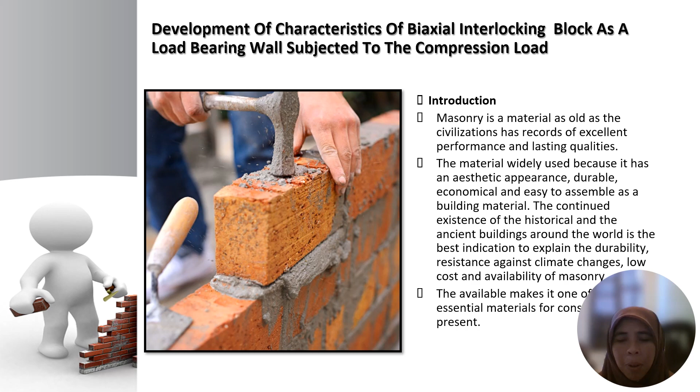as a building material. The continued existence of historical and ancient buildings around the world is the best indication to explain the durability, resistance against climate change, low cost, and availability of masonry. The state of the art of masonry, the biaxial interlocking block or BIB, is a new masonry unit that has been introduced to the industry. This masonry unit consists of multiple grooves and tongues as a locking system in the X and Y direction.

The interlocking blocks give various advantages such as reduced self-weight, reduced design load, simple handling, simplification of building components, increased compressive strength, reduced workforce, increased construction quality and quantity, and reduced project construction time. Furthermore, the interlocking block units can be applied as a load-bearing wall by a reinforced method, which is putting in grout material.

This study focuses on biaxial interlocking block properties and behavior as a walling unit with the interlocking mechanism through the grooves and tongues under uniaxial compression load. The main features which a masonry wall must offer are compression, tensile, flexural, and shear strength. Generally, masonry is strong in compression but weak in tension. The compressive behavior of masonry due to vertical load is of crucial importance for design and safety and has been studied extensively over the years.

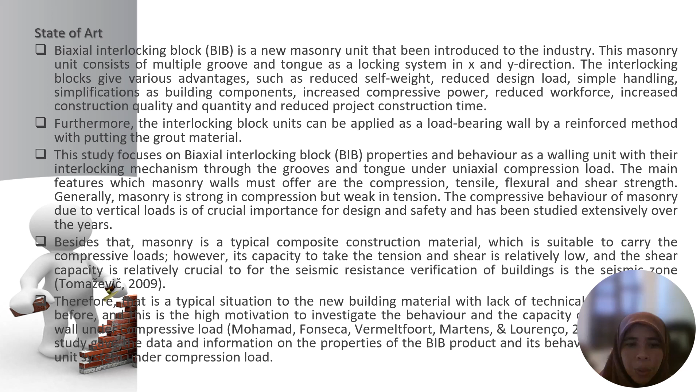So, the problem statement for this research starts with the current application of masonry material in construction projects. As we know, cement sand brick is the most preferable masonry unit in masonry construction. It is due to the advantages of cement sand brick, which are low cost material, light in self-weight, etc. However, there are several weaknesses of brickwork masonry, such as labor, time consumption, and quality of the project.

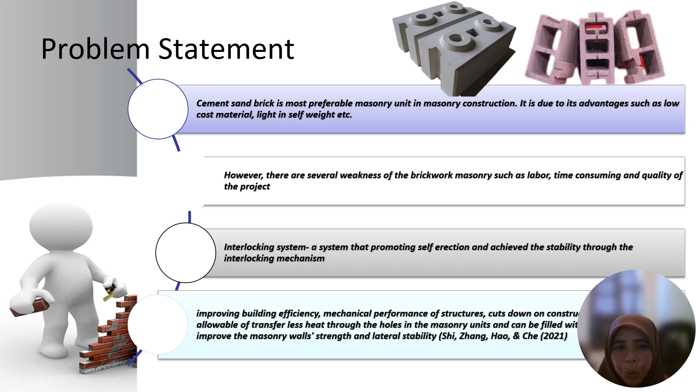Interlocking system is a system that promotes self erection and achieves stability through the interlocking mechanism. So the objective of this study is investigating the properties and behavior of the biaxial interlocking block (BIB) subjected to compression load in masonry construction. To ensure that BIB is appropriate following the British European Standard BS EN 1996-1-2:2005 masonry structures, the BIB needs to be studied inside and out.

Therefore, the objectives to achieve this aim are: first, to develop properties of the BIB single unit with and without grouting material, and then compare to the cement sand brick and solid block properties. Second, to evaluate and analyze the mechanical properties and behavior of the wall system using grouted and ungrouted BIB compared to the cement sand brick wall and solid block walls.

Third, to assess the correlation coefficient and develop mechanical properties prediction equations of grouted and ungrouted BIB, cement sand brick and solid block walls. The fourth is to perform a parametric study using the established model and evaluate the walling properties due to changes of parametric values of grouted BIB, ungrouted BIB, cement sand brick, and also solid block walls.

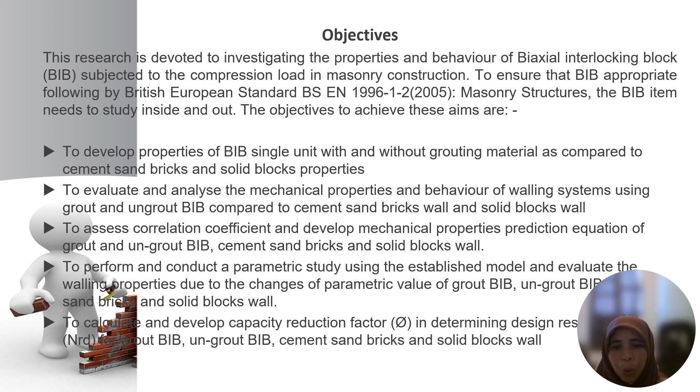And the last one is to calculate and develop the capacity reduction factor in determining the design resistance of the BIB unit, cement sand brick, and solid block walls. So the scope of this study covers the title and objectives of the study, and can be divided into several parameters. First is the material of the research, which is the biaxial interlocking block, cement sand brick, and also solid block unit.

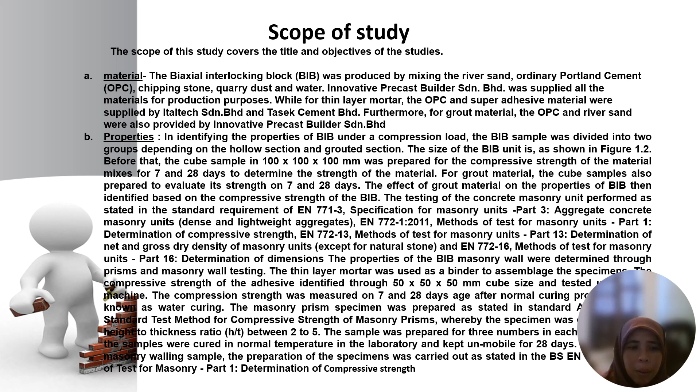So in identifying the properties of BIB and other masonry units, all the material will be tested under compression load. And also for finite element modeling, FEM was performed to produce the established model for validating the laboratory work with the software Abaqus 6.14, and simplified micro modeling was chosen based on previous studies showing this method is suitable for new masonry unit material, purposely for the interlocking concept.

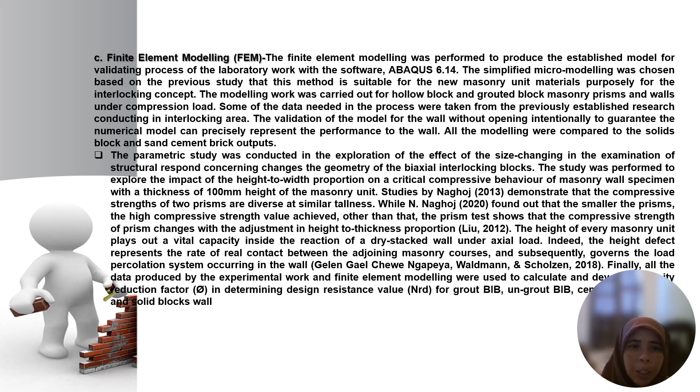So these are the properties of the biaxial interlocking block. This is a newly available interlocking system produced by Innovative Precast Builder Sdn. Bhd., and the dimension of the block is 700 mm by 100 mm by 150 mm. This system offers multiple grooves and tongues on the top of the BIB.

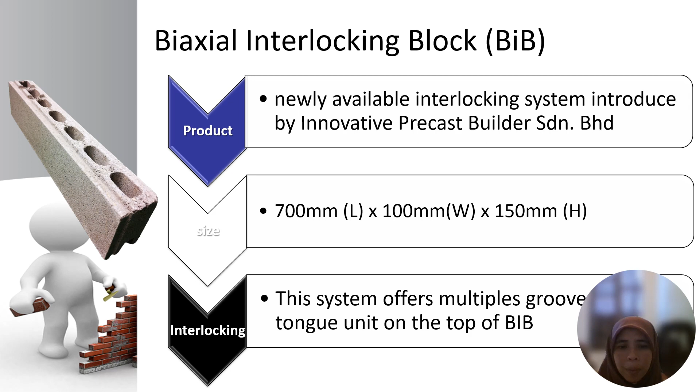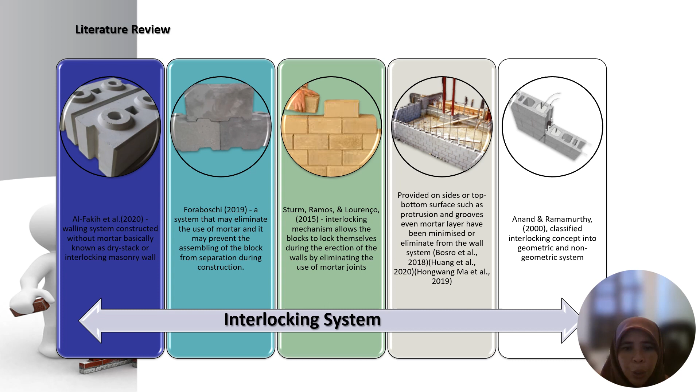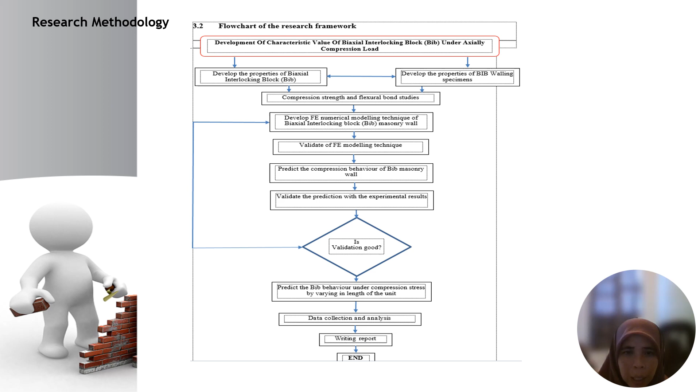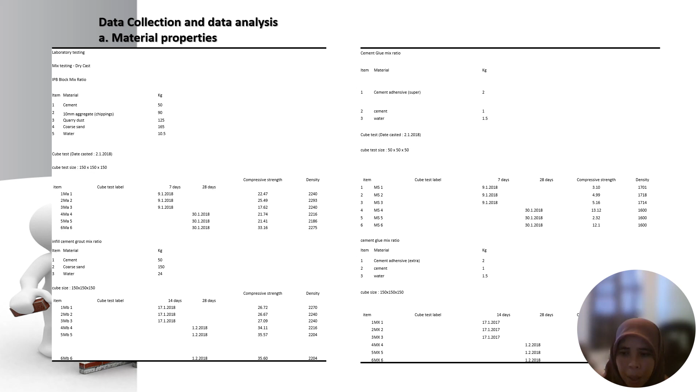So this is the research methodology of the BIB new masonry unit. And this is data collection and data analysis. The first one is material properties. This is the flexural strength test data, and this is the procedure of the flexural strength test. This is an example.

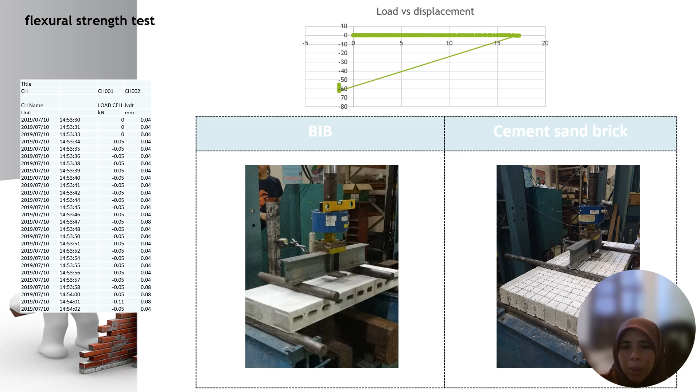And this is the modeling and validation process on experimental results of the BIB load-bearing masonry walling system subjected to compression load using Abaqus finite element analysis software version 6.14. In this modeling approach, the concrete damaged plasticity model was chosen to represent the mechanical behavior of blocks and mortar. According to Kmiecik and Kamiński 2011, this model is an adaptation of the Drucker-Prager model, which is also used to represent the mechanical behavior of brittle materials.

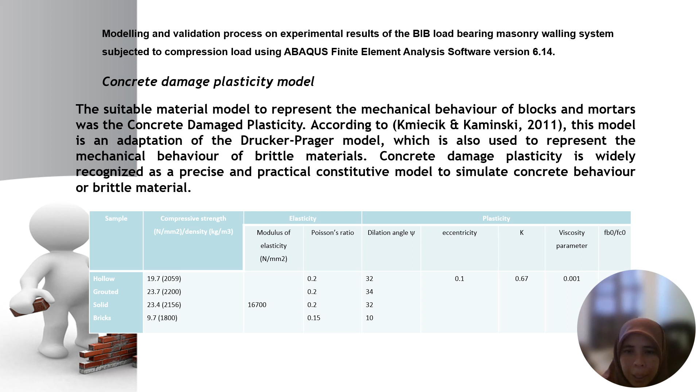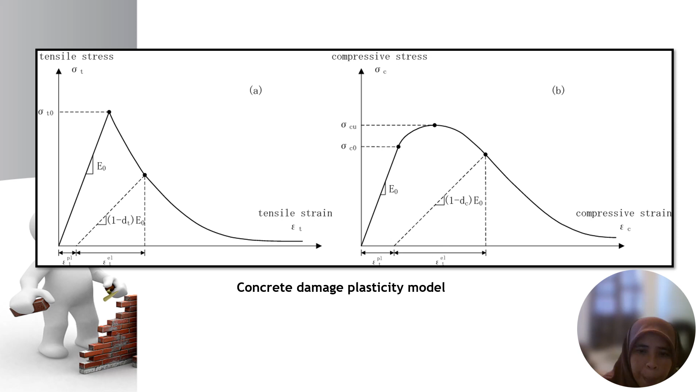Concrete damaged plasticity is widely recognized as a precise and practical constitutive model to simulate the behavior of brittle material. This is the concrete damaged plasticity model, consisting of the tensile stress diagram and compressive stress diagram. And this is the data for the fully grouted block and for the hollow block. This is the Gantt chart to monitor my study throughout the year.

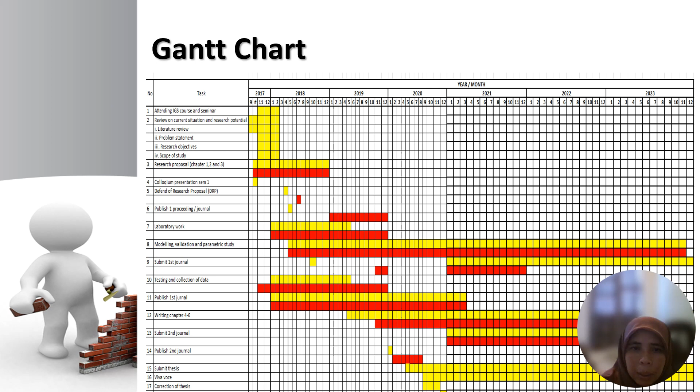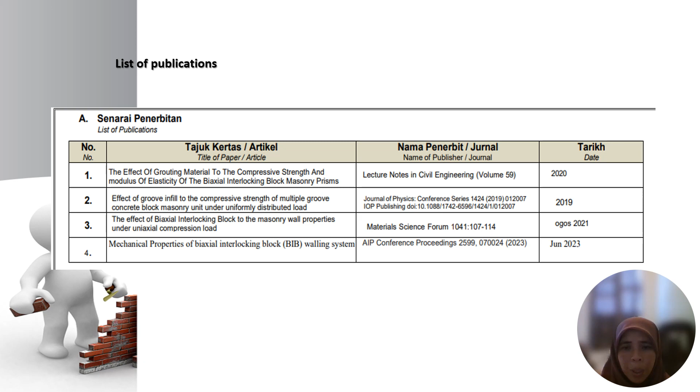For the list of publications, there are 4 articles that have been published during the study, from 2019, 2020, 2021, and June 2023. And last but not least, the status of thesis writing: chapter 1 is completed. Chapters 2 and 3 are under second draft. Chapter 4, objectives 1 and 2 were completed. Objectives 3 and 4 are about 40% progress, and objective 5 is about 10%. Chapter 5 is not available.

And for my planning for the next semester, I'm going to perform parametric analysis on modeling, and hopefully produce the final thesis writing by producing chapters 4, 5, and 6.